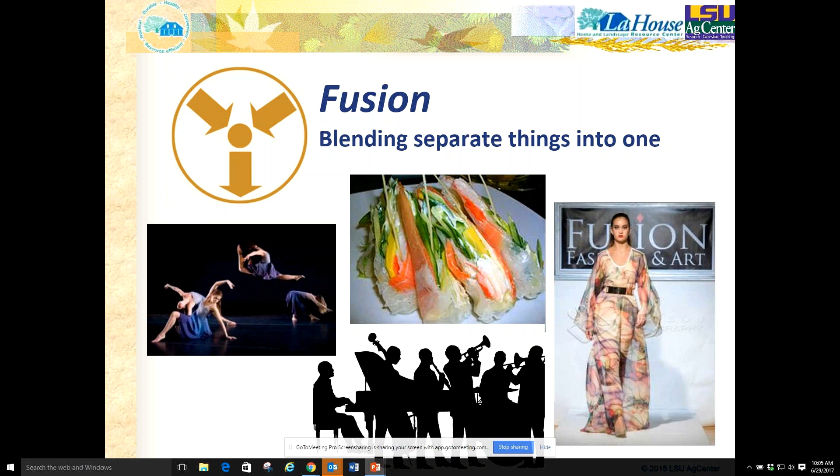This tour will show you how we have blended the benefits that people seek and want at our La House Resource Center. La House is short for Louisiana House, and we use that to address both the restoration after natural disasters and other benefits that we seek. Fusion, we see it everywhere in our culture today. What that means is the blending of things that used to be separate into something altogether new and better that's combined into something else. We do it with fashion, with food, with music, with art.

But when it comes to housing and the programs that relate to housing, and the research that goes into it, and whatever is facilitated, often at our government and agency level, it's kind of been in silos. We have these agencies with separate missions, and so the housing programs and these benefits and features have kind of been in silos historically. But being that our program is the Cooperative Extension Service, an educational outreach arm that is all about taking science-based information and combining it in ways to address needs and issues and to be a change force for people in the real world, we knew that we wanted to pull all of this together.

So way back in 2000, we developed this vision to create a center which we call La House, short for Louisiana House, to shape the future for Louisiana living, but really it's become a whole regional facility as well. It's all about the concept of sustainable housing, and it's a permanent educational exhibit now that's open to the public, and it applies well to the entire region, the southeast region.

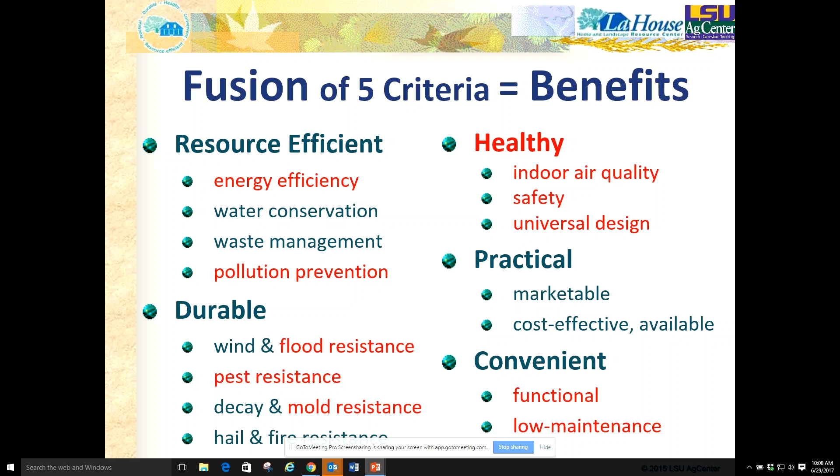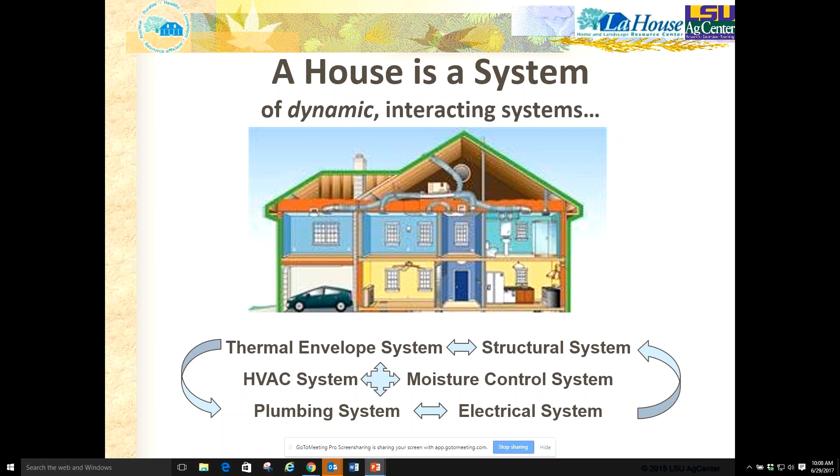Having one without the other just doesn't cut it. They need to be integrated. But to do so with the modern knowledge that we have, especially when you get to high efficiency, it's really important to recognize the house is a system. It's not just a box. It's a system of dynamic interacting systems, just like the human body, and anything you do to one affects other portions.

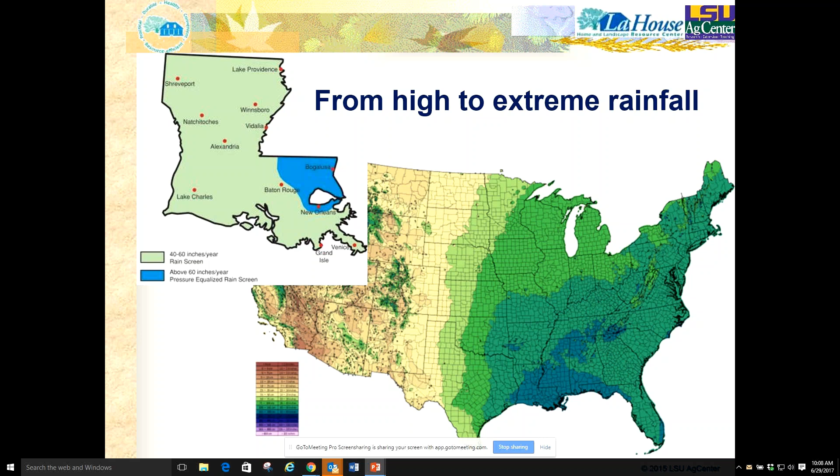Also, it's important to consider climate. It matters, it makes a difference. It has big implications with moisture control. Our part of the world is the hot, humid climate zones 2 and 3, pretty warm and humid. But we're also a very wet area down here, and that poses a lot of challenges. Much of the country is wet also, though we may be a little wetter.

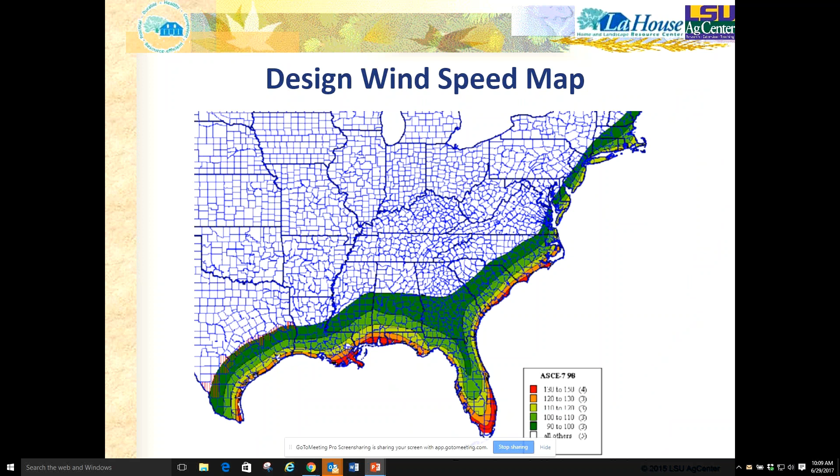So La House was built to be kind of a showcase of solutions to all of those conditions and issues and climatic factors, but not just one solution, because there isn't just one good way to tackle that.

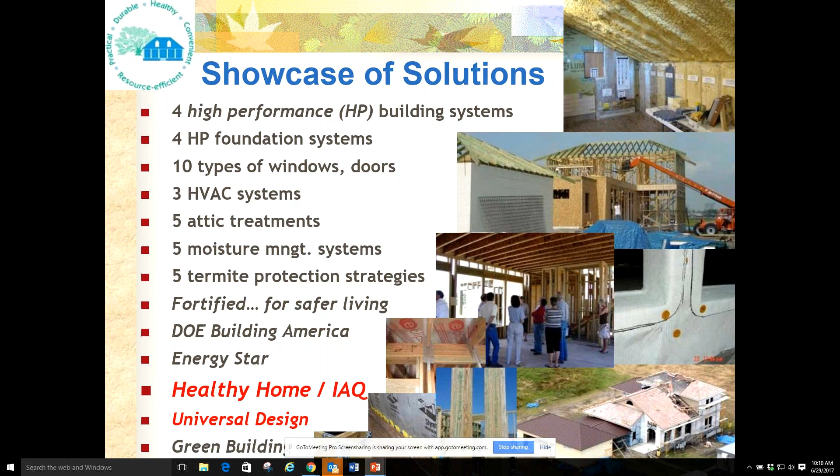So the house essentially shows 4 different high-performance building systems and a lot of different components, 3 HVAC systems, 4 raised foundation systems. It demonstrates all the features. Each of those demonstrate the features of fortified for safer living, as well as healthy home and indoor air quality criteria and universal design, which we'll touch on more.

As I mentioned, La House has 4 high-performance building systems, each wing, and then the garage is a 4th one. It's a different one, and you'll get to see just a little bit of that.

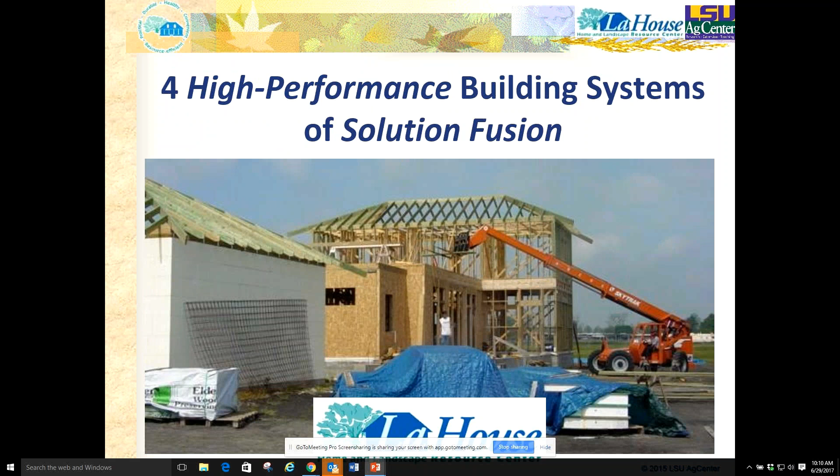It was designed by local architects to really blend all these criteria with the design of the LSU campus, because it's on campus. But the first level of the house really is furnished like a home, to have a look and feel of a home, to really help the adoption process, the emotional side, and then a meeting space in what looks like a garage on the outside, conditioned.

The second level is our staff offices and a big exhibit room in actually the unvented attic.

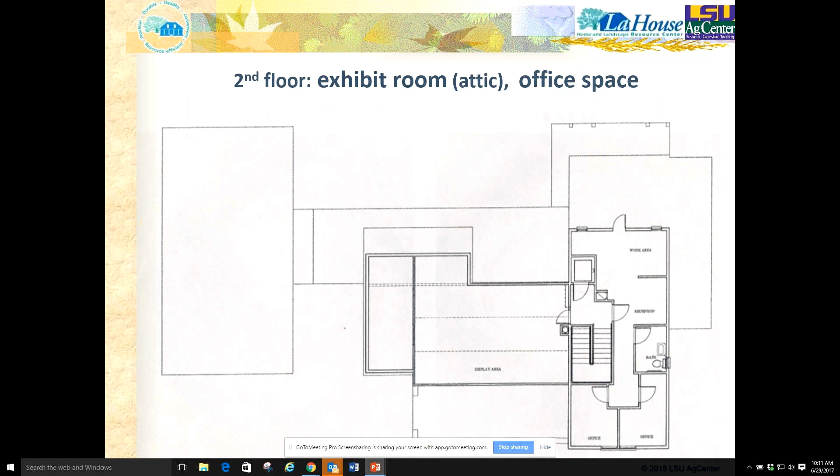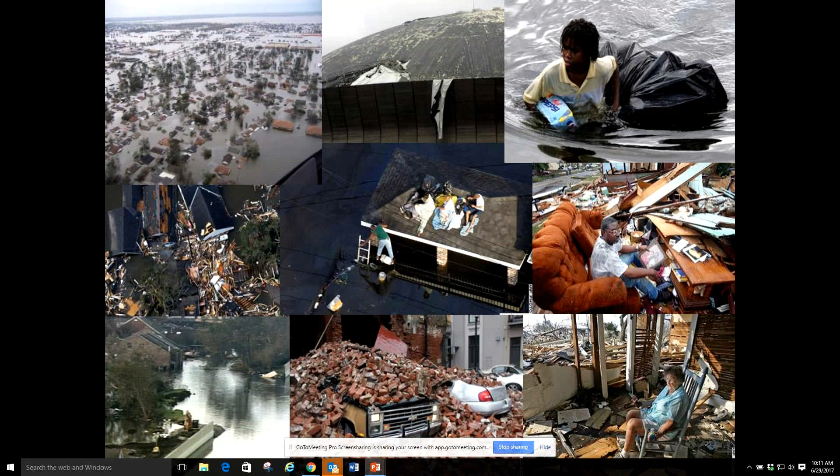So we were getting underway with that, and then in the year 2005, everybody knows the horror that happened, Katrina and Rita, within 3 weeks of each other. You saw the images on television. You saw how terrible and awful it was, and what my state had to deal with. But the impact upon just one state, upon my one state, was unprecedented in the history of this country.

But beyond that, think about the impact on families, what they went through. Look at these images and just try to imagine the work, the time, the cost, and the toll on their health and well-being to deal with this.

That gave all new meaning and new focus to our kind of slogan and our effort in our program, to the concept of, as we shape our homes, we truly are shaping our future. It matters. It's not just about aesthetics.

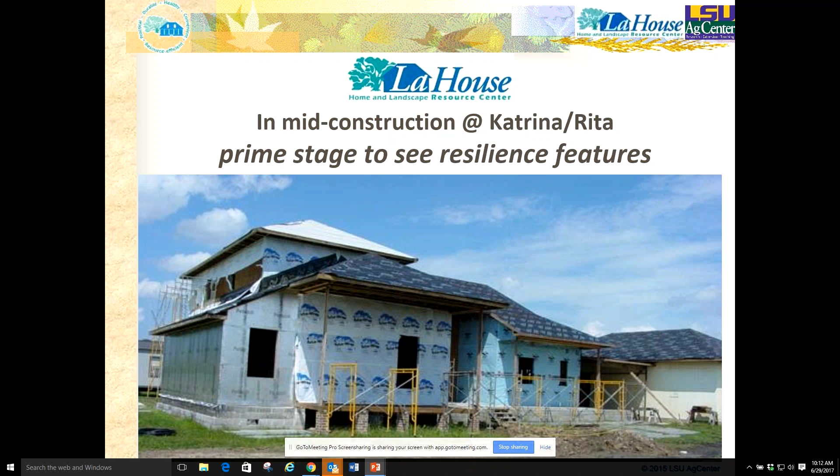La House happened by chance to be in mid-construction when Katrina and Rita hit, and it had all of these fortified features, all the hurricane, the flood hardy, the elevated foundations, the termite features, already fully exposed. So it was kind of this ready exhibit at that point, which was just almost eerie that it happened that way. We left it that way, showcased it, did open houses for 2 years, and it was really perfect for that.

But then we went back and finished it in '08, and now it is a facility that's open to the public Monday through Friday. People can just drop in for self-guided tours. We have cutaways and all kinds of things, and there's a little tour map.

So I'm going to cover those kinds of features that are primarily the primary purpose and objectives, and the benefits of them are the healthy home features that are exhibited in the house.

I'll do this through touching upon each of the 8 principles of healthy housing and show some house-related exhibits and components that address each of those principles throughout these criteria.

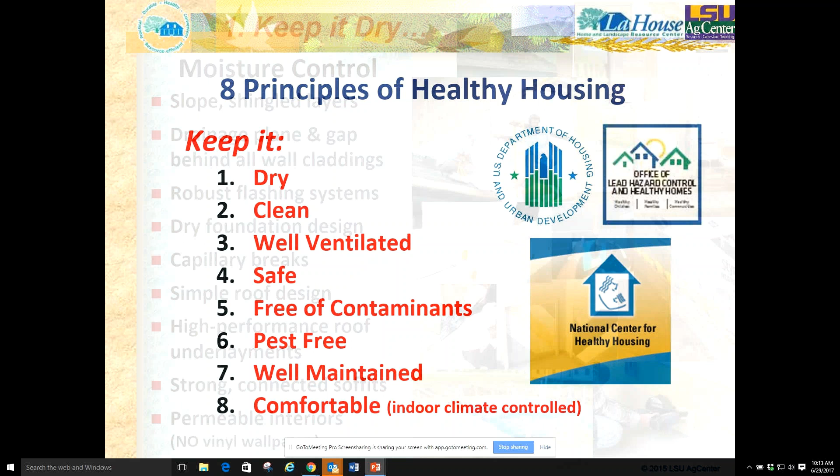First and foremost, keep it dry in our wet, flood, hurricane-prone, hot, humid climate. A house incorporates a whole range of moisture control and rain control measures to minimize water intrusion from rain, allow it to drain down and out, and keep it from wicking through foundations and other components. These are all key features, because water intrusion is going to happen, and we try to stop it by realizing that water normally flows downward by gravity, except when it doesn't. That happens a lot because of wind, hurricanes, wicking through materials, soil, hydrostatic pressure, adhesion, all kinds of things. So keeping all that in mind.

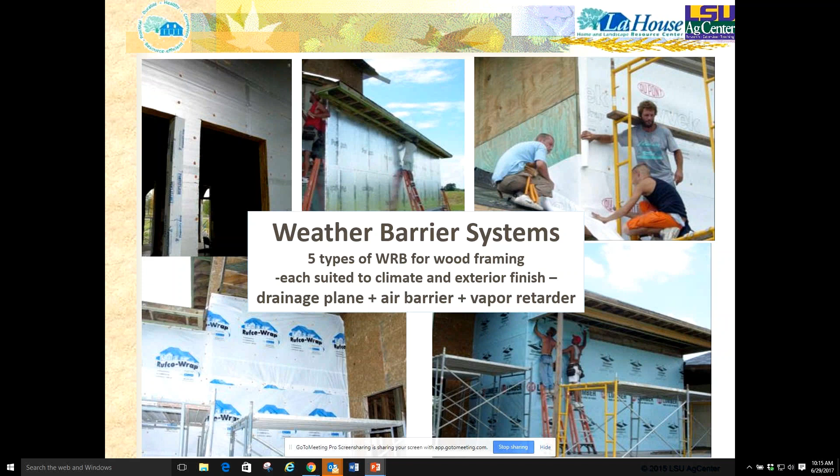That's why building with good weather barrier systems is really important. We used quite a variety of them, meaning a water-shedding material outside of the wood with a gap so it can actually drain. We also sealed it to create an air barrier, which in our climate is good to reduce moisture vapor transmission on the outside rather than the inside layer. A complete drainage plane done right in the field, when you ride around and see houses under construction, is really hard to find. It's rarely done right, and it's even harder to add later.

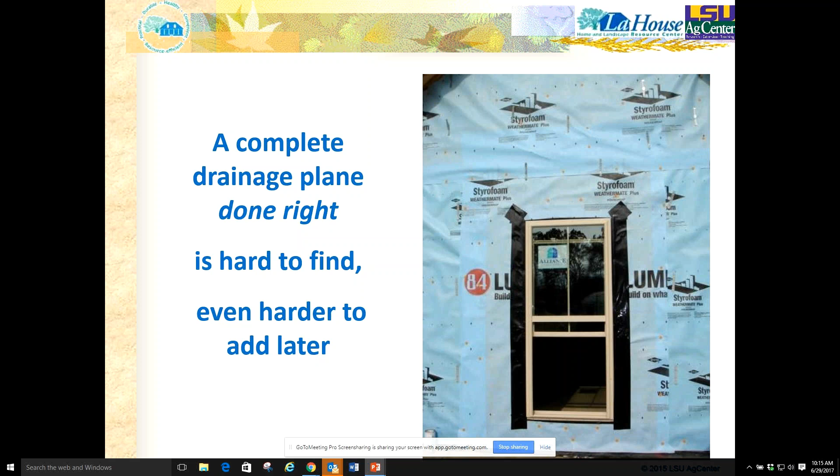The weak link is really the detailing around windows and doors, the way all of that is integrated. The house shows a variety of methods we used. There are wonderful products out there to do that now, and we have exhibits you can see, a cutaway with a fact sheet on how to install these new products to provide detailed protection at the spots where windows tend to leak the most.

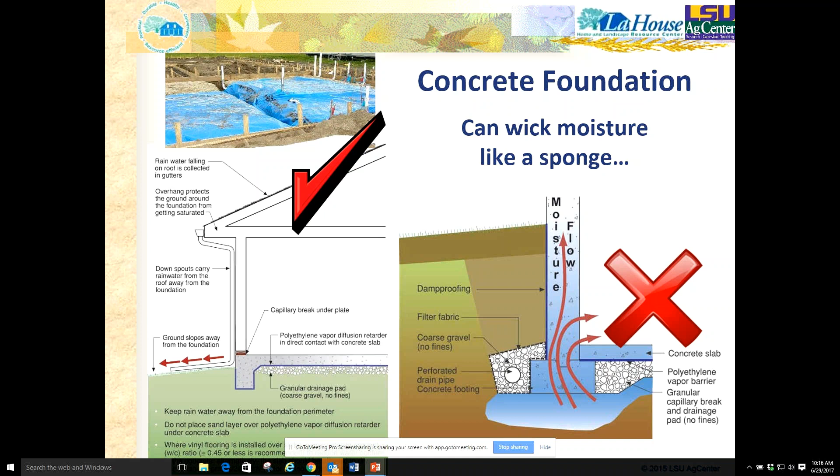The foundation is another huge factor in keeping it dry, because most people don't stop and think about how concrete, brick, all of this really wicks like a sponge. We tend to have flaws where we put a vapor barrier under the flat part, but not the grade beam. So we teach that as well.

What we found is that really just two subfloor insulation systems worked really well to maintain a stable subfloor moisture condition in raised homes, which we need for flood-prone areas. Around the rest of the country, all the research and the tendency is to go with the sealed, conditioned crawl space. But that's not a good idea in a flood zone, or in my opinion, any place in South Louisiana, given such a high water table and our termites.

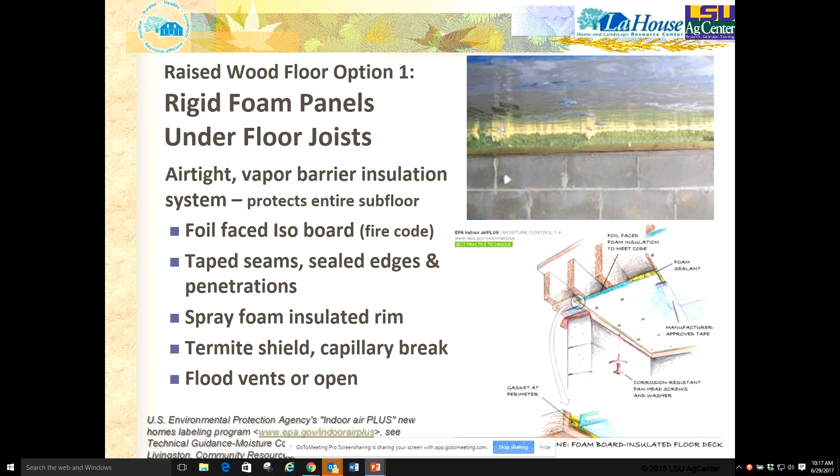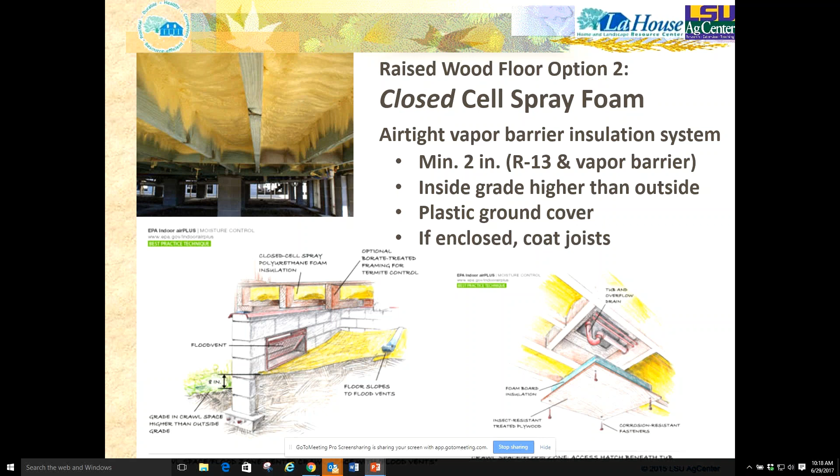One system is foil-faced isocyanurate rigid board under the entire subfloor system, under the joist, taped and sealed airtight. The other is closed-cell spray foam sprayed right under the subfloor. Both of these create an airtight, low permeability, integrated insulation system that keeps the subfloor dry, and then you can have any kind of flooring you want.

Indoor humidity control is extra important for health, and it's even more challenging and important in energy efficient homes. The more energy efficient the home or building, the smaller the margin of error for moisture control. You also have very little need for cooling and heating, but the need for dehumidification does not get reduced—it does not change. And so that becomes difficult.

So moisture control: reduce moisture generation, exhaust it where it is created, right size the HVAC system so it's not too big, so it runs more, have a variable capacity or added dehumidification.

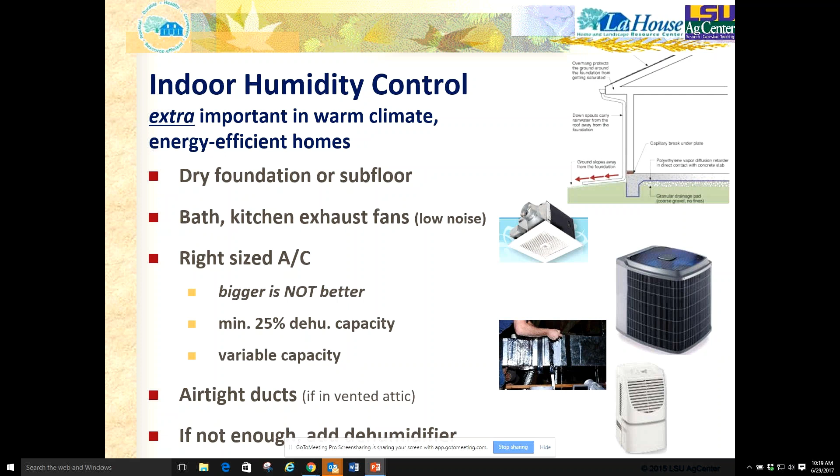And prevent leaks in ductwork, which tends to drive it. We'll talk about that a little bit. These are all really important strategies.

The second healthy home principle is keep it clean.

La House illustrates that with easy care, cleanable, smooth surfaces that are easy to clean and keep free of dust mites and other contaminants.

We also include the Japanese concept of shoe cubbies at the family entry, so you can put all your dirty stuff there and not track lead-laden soil all across the house, and a lot of mold and moisture resistant materials as well.

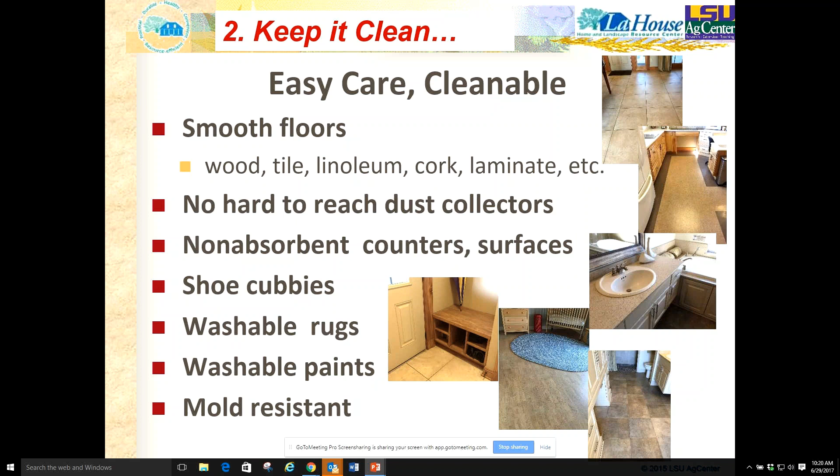The third principle is keep it well ventilated. This is key, and there are three components to proper ventilation.

In the colder parts of the country, you're thinking you need ventilation so you don't have combustion gas buildup, but that's not so much our issue.

Proper ventilation really is about having good local exhaust that works at the source of a pollutant, and having some clean, fresh air that comes into the home to dilute indoor contaminants, things that off-gas.

And to properly distribute and control the airflow so that you minimize humidity problems, a big issue for us, and energy loss at the same time.

So for us, and really most of the country, the best practice is to build tight and vent right, but you can do that a little differently whether it's a cold climate or a hot climate.

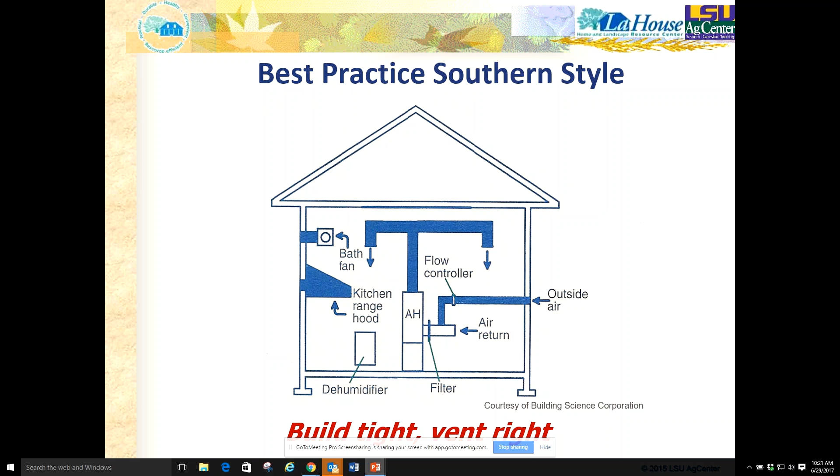And this kind of illustrates best practice Southern style, which I'll touch on.

First and foremost is having effective exhaust, spot exhaust, where you generate a lot of moisture and where you generate pollutants, over the kitchen cooktop and in bathrooms and laundry as well.

And if the fans are not quiet, people won't use them. So quiet fans. But the real limiting factor for many is often lousy installation of the ductwork.

With S-curves and U-turns and flex duct, that will reduce the airflow greatly. So proper installation of quiet, powerful exhaust fans is important.

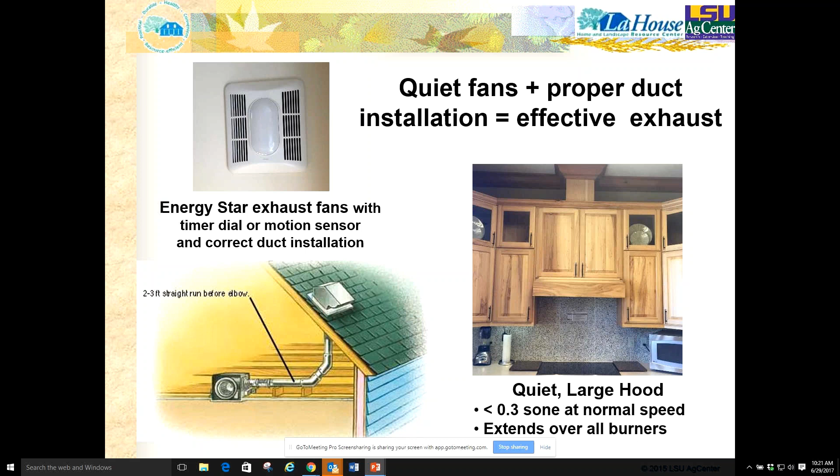And in our climate, supplying fresh air, not exhausting air, is the way to get that fresh air ventilation. And that gives you control.

You can control the amount with a damper control, flow control system, filter it, know the source, where it's come from. That is the best way to bring in just the right amount of fresh air without moisture loading.

But when doing so, particularly in the shoulder seasons when you don't need either heating or air, sometimes at a highly energy efficient home that's not enough, and supplemental dehumidification may be needed.

La House has four different types and levels of dehumidifiers, from a low cost $120 model to a $2,000 ventilating dehumidifier, which is what's actually used here, to show the range of solutions that fit the need.

Healthy home principle number 4 is to keep it safe, and that's where we bring in and illustrate universal design. Universal design is not just about ADA for people who use wheelchairs.

It's about design for life, for all ages and stages of life, from babies and toddlers, having it safe for them, and that includes lead safety, to people who use wheelchairs or walkers or have arthritis or vision issues.

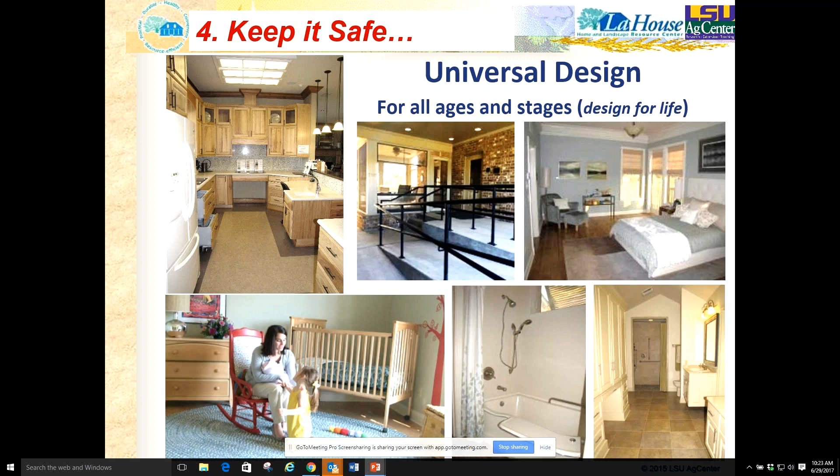Accessibility, whether you're standing or sitting, see well or not, whether you're a little child or an elderly person, you can function and be comfortable and safe in this situation, in this home.

Principle number 5 is keep it free of contaminants. That means good indoor air quality, good indoor environmental quality.

La House has no combustion inside the building envelope other than direct vent sealed combustion. We have a fireplace because people want that, but it's a direct vent sealed combustion, a closed loop. It does not use indoor air to fuel the fire, and there's no chance of backdrafting.

Everything else is outside the building envelope, any gas equipment, the gas tankless water heater, a gas backup furnace, and nothing else is inside. So no combustion indoors within the building envelope.

Effective quiet exhaust, mold-resistant materials. Another feature, particularly for any place where there's air conditioning for more than a couple of weeks out of the year: there should be no vinyl wallpaper on interior walls because that's a risk of growing mold behind it.

We do use mold and moisture-resistant materials, low VOC paints and other products, smooth washable furnishings and floorings, shoe cubbies, and dust controls. We have reclaimed furniture, but it's all lead-free. And then, of course, flood and radon-resistant raised foundations to deal with keeping it free of contaminants.

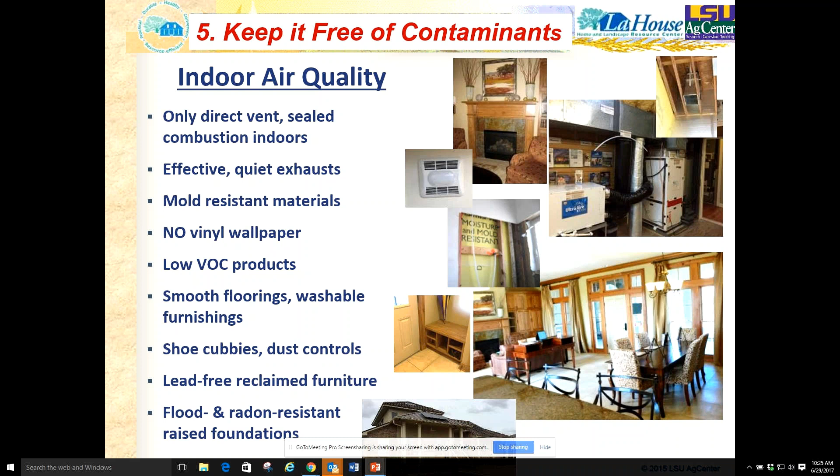The 6th principle is keep it pest-free, and La House illustrates a variety of integrated pest management methods, both for wood-destroying insects as well as normal bug infestations. Tight construction, which is good for energy efficiency and moisture control, is also helpful to keep the bugs out. So these gaskets around penetrations and tight air sealing, as well as favoring borate treated products and boric acid-based pesticides because they're very low toxicity and benign to people, pets, and the environment. So that's barriers, along with moisture control.

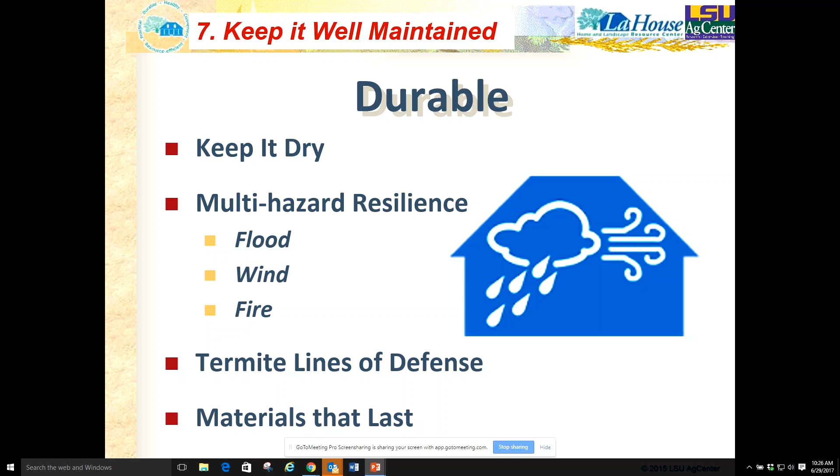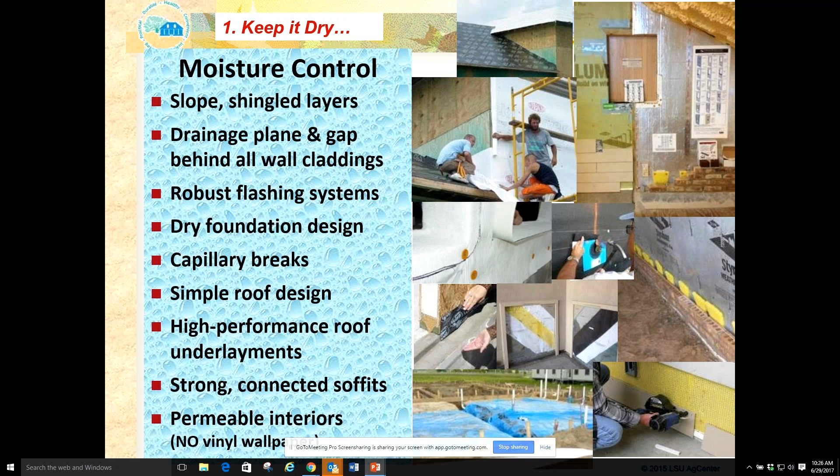The 7th principle is keep it well maintained, and that's where our major criteria and benefit of durability comes in, both in terms of durable construction and materials, but also in terms of hazard resistance - flood, wind in particular, and also fire. Again, moisture control is key for durability, otherwise you end up with decay and degradation. We've already touched on this, so I won't go through it again, but just to mention it.

And then the next big item is flood resistance. We are a very flood prone area and state, as you know, and that is our most common disaster that affects the most people here as well as throughout the nation.

La House illustrates three elevated foundation system concepts, and also the concepts of dry flood proofing and wet flood proofing. Dry flood proofing is trying to keep the water out by sealing it and having closures. Wet flood proofing is the concept that water would come in but do very little damage, so you just clean and don't have to gut and replace everything.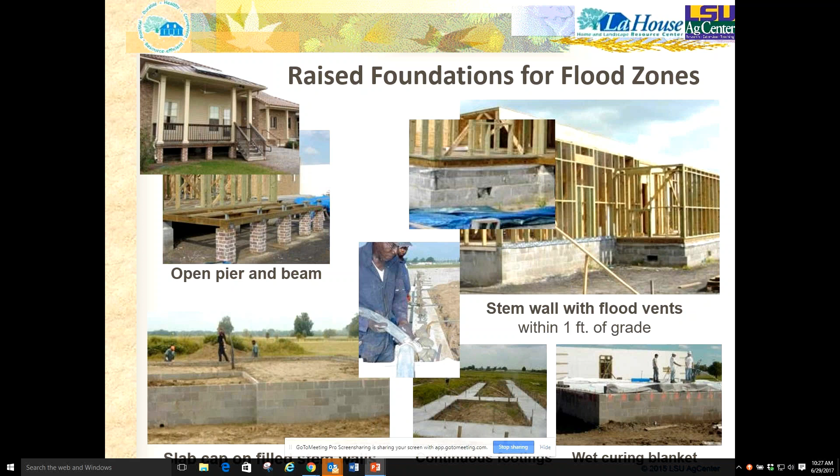The raised foundation systems for flood zones - we show the slab cap over a filled stem wall, very robust but kind of expensive, as well as the open pier and beam, the more traditional approach, and the stem wall with flood vents within a foot of grade as required by the flood insurance program.

We also show the concept of wet flood proofing, but I rarely use that term. I generally call it flood hardy. And this is particularly valuable in areas where there's an uncertain flood risk.

The flood maps are based on a 1% chance in any given year, and you can certainly get floods beyond that. The area where I am, we just had the worst flooding in our history last year, the historic Great Flood of 2016 in Louisiana, and about 70% of all the homes that flooded were outside of the flood map risk zone because this was a historic flood that exceeded that. Particularly in areas where your flood zone depends on levees and pumps, like New Orleans, that's not a good bet to rely on being above it.

So the flood hardy building systems are concepts that create a building assembly that is below the potential flood risk, not just the flood map risk, that can be drained, flushed out, ventilated, dried, cleaned, and restored and put back into place without having to gut and replace and wait for contractors and wait for materials and get rooked by shady ones who just inflate their prices or steal the money and leave.

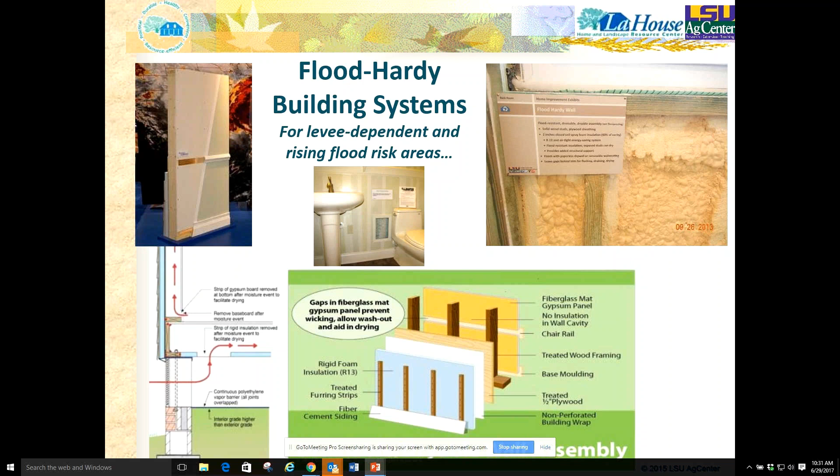Our teaching center, which we call our garage, is an insulating concrete form building system that is flood hardy in itself, but it also had waterproofing put in the bottom 3 feet. If we had flood enclosures, which we don't really for the doors, that could be an example of dry flood proofing, which is approved for commercial structures by the flood insurance program, but not for residential.

But some people may choose to want to do that. Besides flood, hurricane resistance is important for durability in the hurricane zones or any high wind zones.

Studies have shown that this sequence are the major building envelope issues. The major damage and losses on property insurance were in this order: top of the list are roof loss, roof damages that allow water to come through, and broken windows that allow the wind in and cause structural damage. So loss creating big holes in the building envelope is what puts the structure at risk.

So flying debris, window and door anchorage, garage doors, sliding glass doors, and then water leakage through these openings, and finally the ridge vents, gable vents, and soffits that blow out. Those are the major issues.

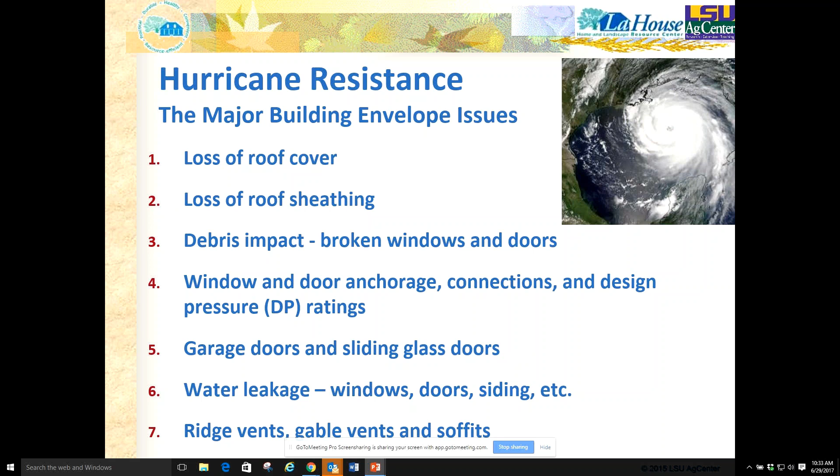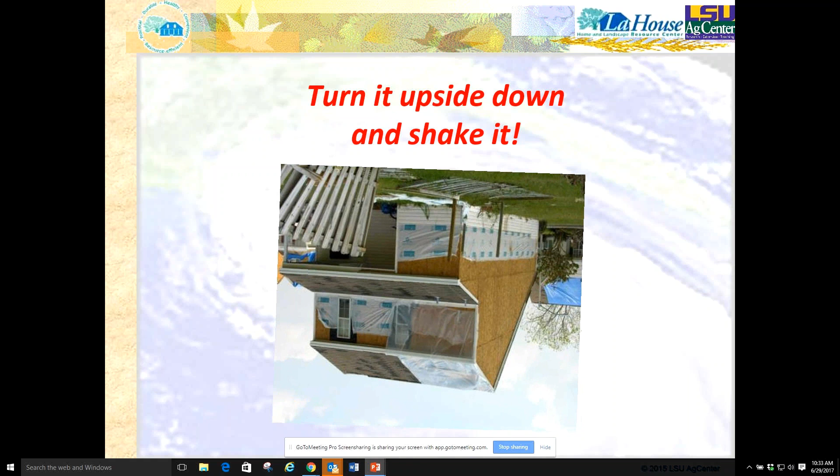When there is a high wind event like a hurricane or a tornado, we build houses to hold up their weight, but what it's really like is turning the house upside down and shaking it. Where is it going to come apart? That is the weak link.

Wind resistance was incorporated throughout these 4 building systems to go to a higher level for the fortified program, up to about 130 miles per hour, which is beyond what's a code requirement here. In doing that: good aerodynamic roof designs, hip roofs with moderate slopes, high performance wind-tested roofing and underlayments, full structural sheathing to prevent leaning and racking, nails with good pull-out resistance, and window protections from flying debris, stronger garage doors and connections.

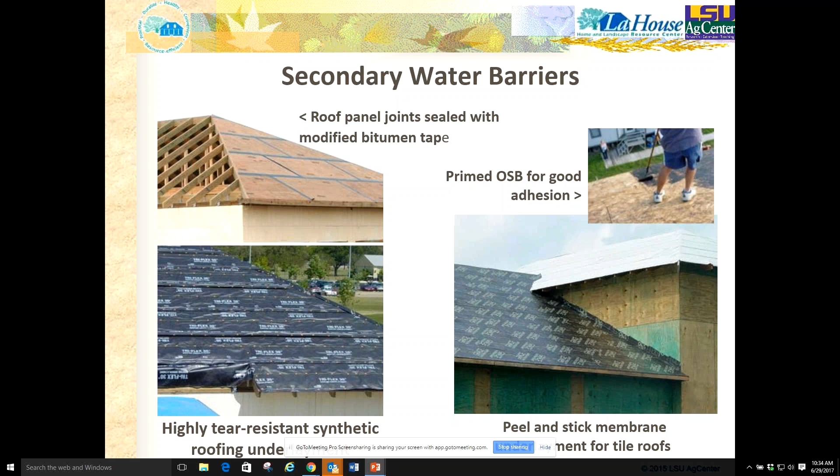First of all, with that roof is secondary water barriers. Yes, the wind-tested roofing, but if you do lose some shingles, keep the water out. So high-performance underlayments and taping the seams.

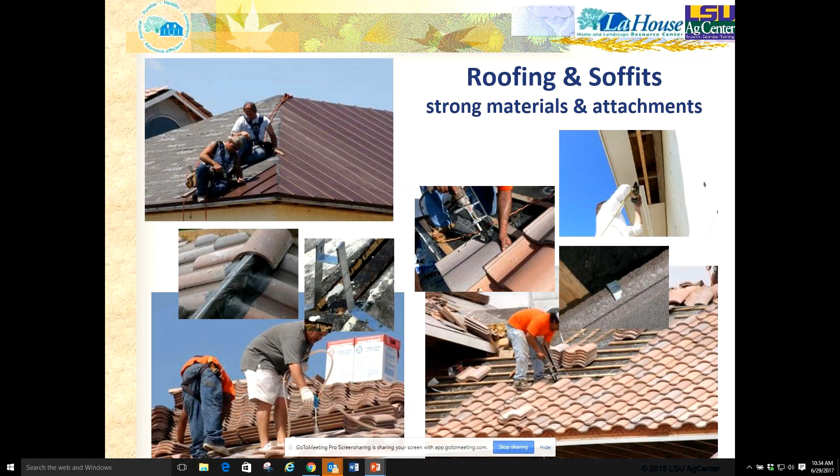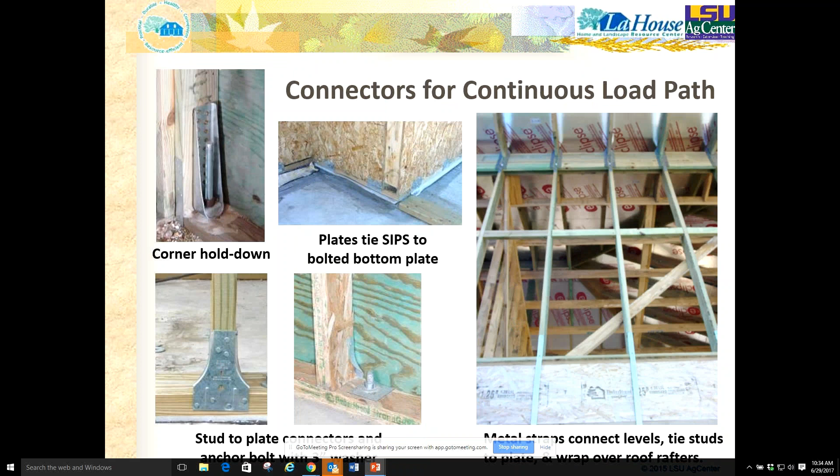Houses utilize extra strong connections, mechanical connections, and hurricane clips. Strong soffits actually fastened, not just hung, so that they stay in place. And of course the metal hardware, the connectors tying every component of the framing together from the roof all the way down to the foundation.

We show about 7 or 8 different kinds of protections from windborne debris, many of them retrofittable as hurricane shutters or screens or fabrics or removable panels that are much easier, lighter weight, and a more convenient alternative and easier to store than boarding up with plywood or OSB.

The garage door is often the most vulnerable opening in a typical home, especially an attached garage, and that's where major structural damage is rooted. So this shows a reinforced garage door.

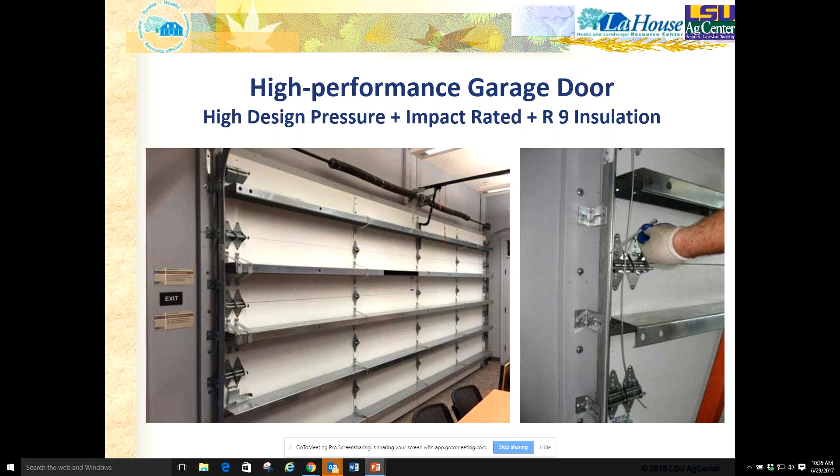We also have some extras, like taking the master bedroom closet and creating a hurricane shelter that is built with normal materials, normal hardware, normal skills, but to a higher level of wind and impact resistance than you could afford to do with the rest of the house.

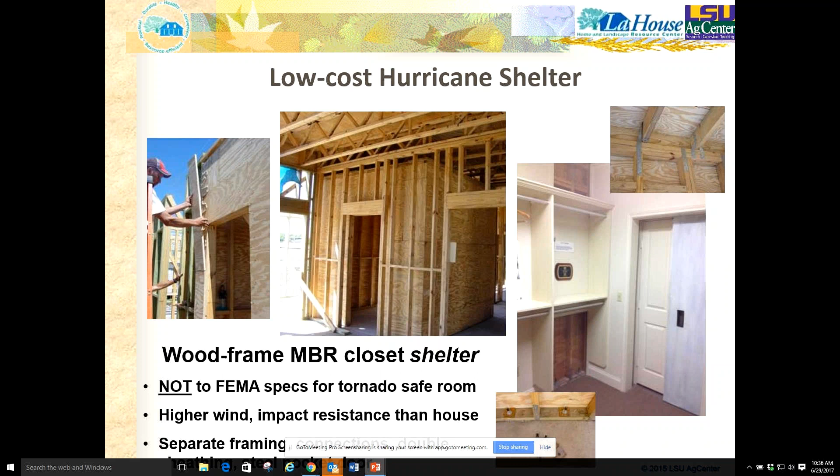Now, this is not a FEMA qualified tornado safe room that could withstand an EF5 tornado, but it would certainly be a safer place to ride out a hurricane, and would be safer than anything else in a low level or fringe area of a tornado. But at an affordable level, because actual safe rooms are very, very expensive.

And then getting back to restoring resilient and healthy homes. So La House does include a variety of examples and exhibits of what people can do with their current homes, particularly after it's been damaged by a storm. As I mentioned before, we have a couple of exhibits of the flood-hardy wall, the drainable, dryable wall with closed cell foam, but we also had the opportunity to create a mobile exhibit that we call La House Mobile.

It was actually built by students. Senior engineering students had to do a senior design project, and we worked with them on this, so this kind of goes on the road, and it shows a lot of retrofit solutions.

As well as the flood hardy wall, it also shows how you can remove siding and add some hurricane straps. Not ideal, but better than nothing. It also has the wind-tested and rated roofing shingles with a high-performance underlayment and taped seams of the roof decking with the ring-shank nails.

Some other things that we illustrate are the removable storm panels, floorings that are resilient. Instead of going back with carpet and wood floorings, and laminate and other things that would have to be tossed after a second flood, go back with flood hardy floorings. And we show glue down tile on slab or composite, limestone vinyl composite.

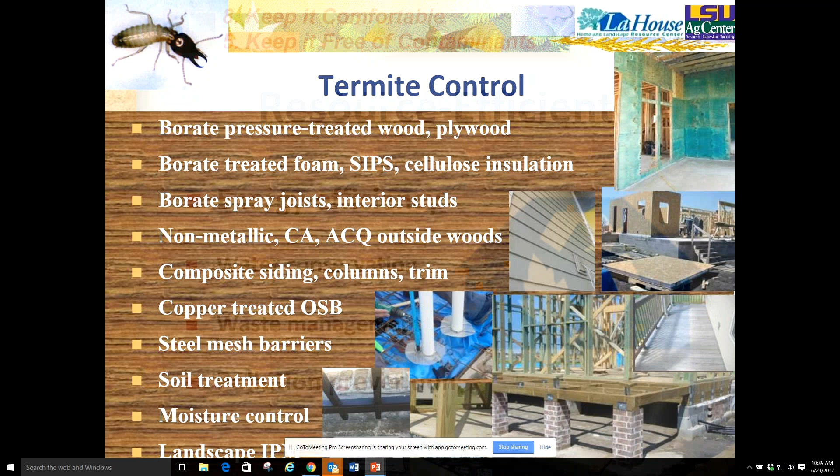The eighth principle of healthy homes is keep it comfortable. Actually, it's keep it thermally controlled, but nobody knows what that means, so I like to use the term keep it comfortable, because basically keeping it warm enough in winter and cool enough in summer to be safe and healthy for anyone. But in doing so, a good way to do that is with energy efficiency, so that you can afford to keep it comfortable.

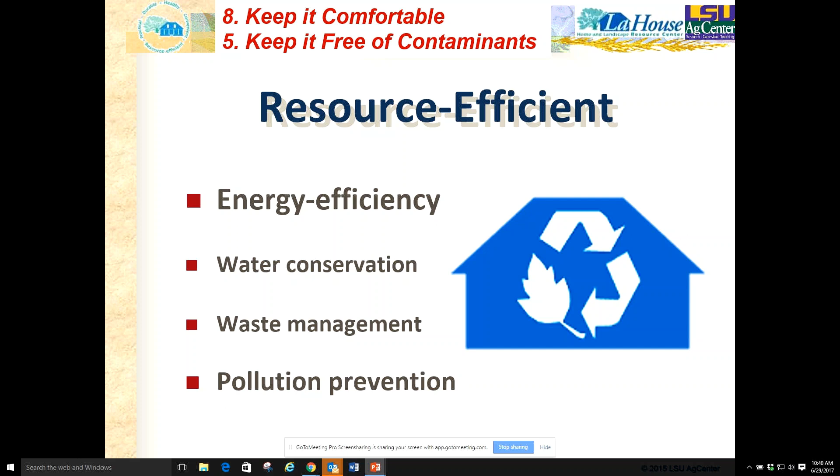That also needs to be done in conjunction with number 5, keep it free of contaminants. You don't want to create an indoor air quality problem by inappropriate weatherization improvements that create issues. So back to keep it comfortable with energy efficiency that actually performs, and it actually pays, so that people get a financial benefit as well as the health and safety and comfort benefit. It's not just about insulation, and particularly in this climate, that's just one piece of what's needed. It's about addressing all of these factors to create a total package of comfortable, healthy energy efficiency.

Energy efficient design and construction in the Deep South and the Southeast really is all about these 3 things. Airtight, so you're not leaking your conditioned air in and out and bringing that hot, humid air in. It's about the continuity of the insulation, not so much a huge amount of thickness or R value, but having it without gaps and voids, because that's what typically happens. And then for us, sun control is the big deal, because the biggest part of our conditioning, of our energy bill, is air conditioning.

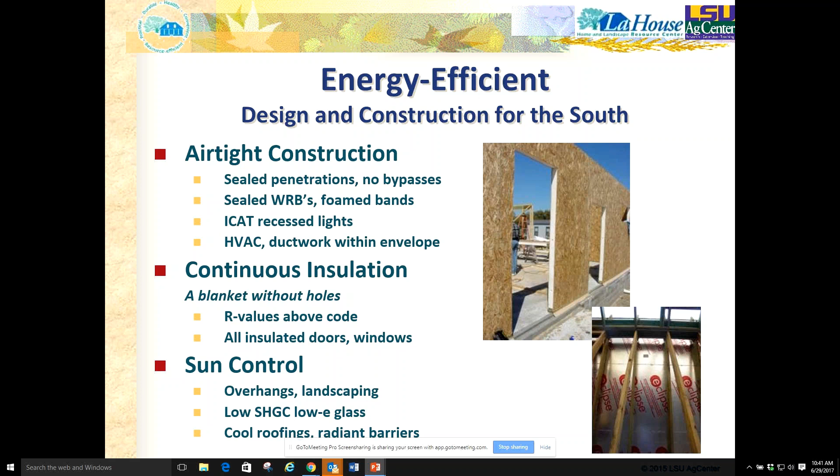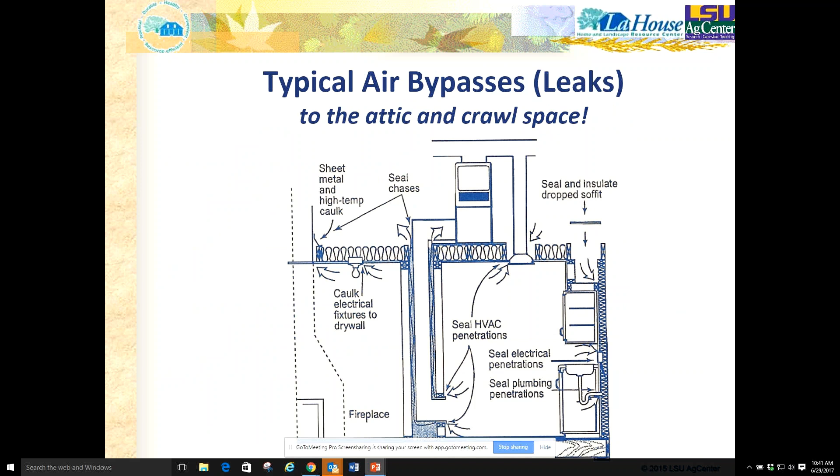And almost everyone has air conditioning, because if you don't, it's really oppressive down here. So reducing heat gain is important. The typical home has tons of leakage points, and the biggest leaks tend to be in that ceiling, what I call Swiss cheese ceilings we tend to have. And it exchanges air with the attic, that hot, dirty attic, so that is not healthy. So addressing those is key.

La House, as I indicated before, has 4 different high-performance building systems that are energy efficient, and each of them reinforced for durability and hazard resistance and health as well. The living room is 2x4 framing, kind of standard practice, but enhanced for added performance, for higher performance and more resource efficient use of products for moisture control, for energy efficiency, and for hazard resistance.

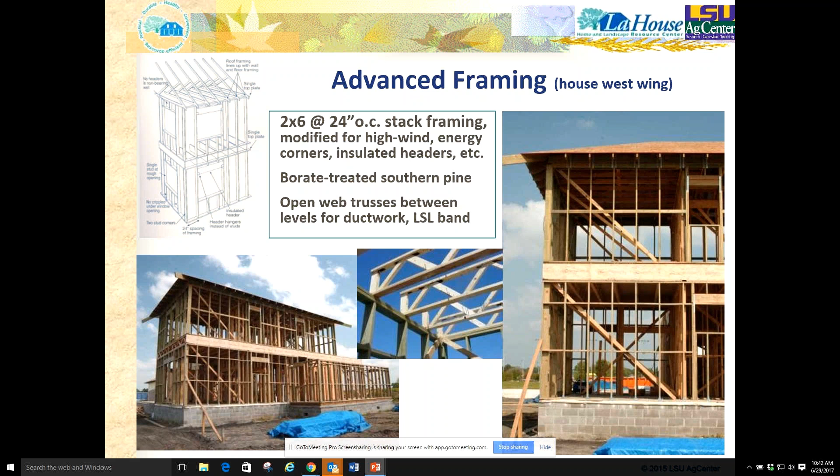The 2-story west wing is advanced framing that's optimum value engineered. We use bigger studs, 2x6s spaced further apart, 24 inches, so you can get more insulation in that wall cavity, and it's kind of a stack framing. You can put ductwork through those open web joists between the floors, keep it within the building envelope. So lots of advantages to doing that for about the same cost, or less actually. The framing details are a little bit different, but not hard to do to allow insulation where it's often missing in standard construction, the corners, the window headers.

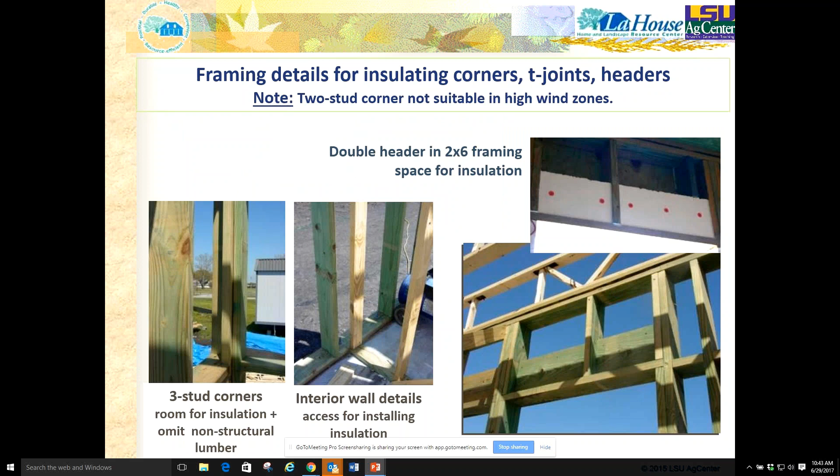The third building system of our east wing is structural insulated panels. These are factory-made panels, which is insulation sandwiched between oriented strand board panels on both sides. So it's structure and insulation in one, goes up really fast, and provides total continuity of insulation and inherently a very airtight building envelope without a lot of need for special workmanship and attention to detail to achieve that.

Those same benefits can come from insulating concrete form. Our garage or training center is built with that, a very low waste system. Also very strong, very resilient from a hazard standpoint, but kind of expensive. And so it's sort of at the high end of our continuum of performance benefits and price as well.

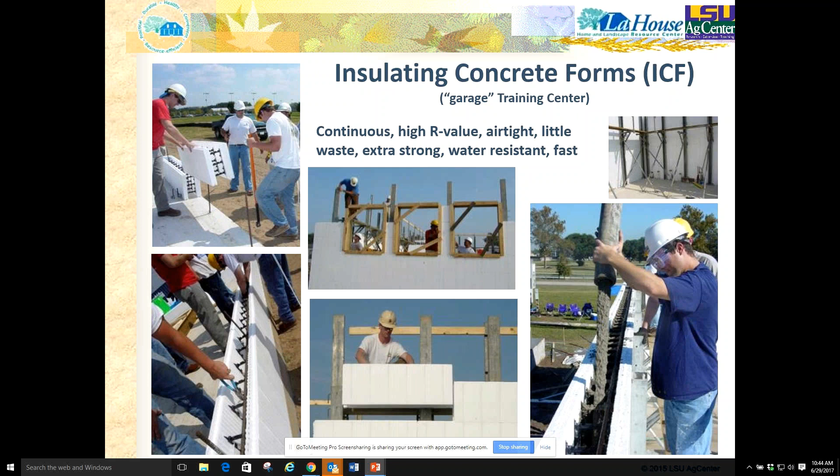Throughout the frame systems, we strategically selected effective insulation systems that provide that full continuity of coverage and help facilitate the air tightness, the tight construction that we seek. And we favored the borate treated cellulose as insulation where we didn't need the spray foam, so we tended to use those two in strategic areas because of all the benefits associated with them.

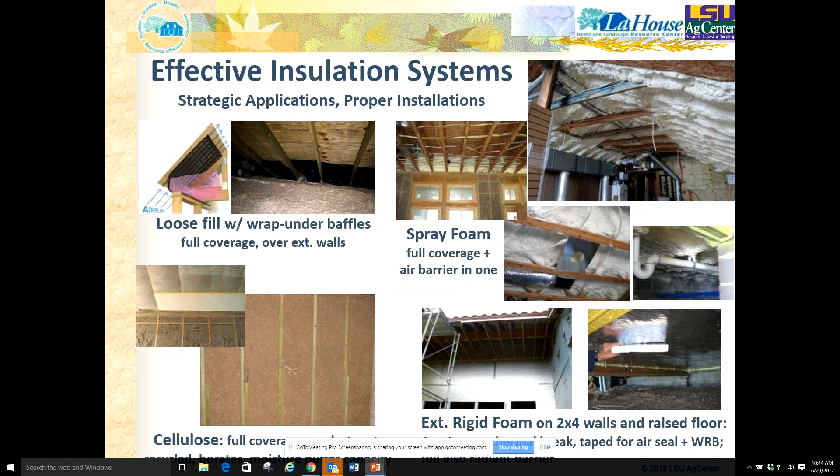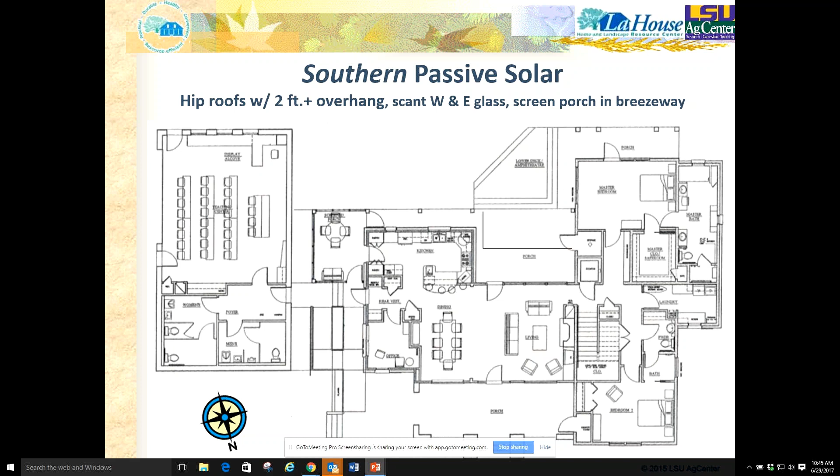We talked about stopping that solar heat gain, and this is especially important for people who cannot afford any air conditioning, but even those who do, trying to reduce that heat gain is important. So LaHouse incorporates what I call southern passive solar. Instead of passive solar concepts to gain heat in winter, we do it more to reduce heat gain year-round, particularly in summer. So that orientation has most of your exposure and glass on the south and the north, very little on the east and west.

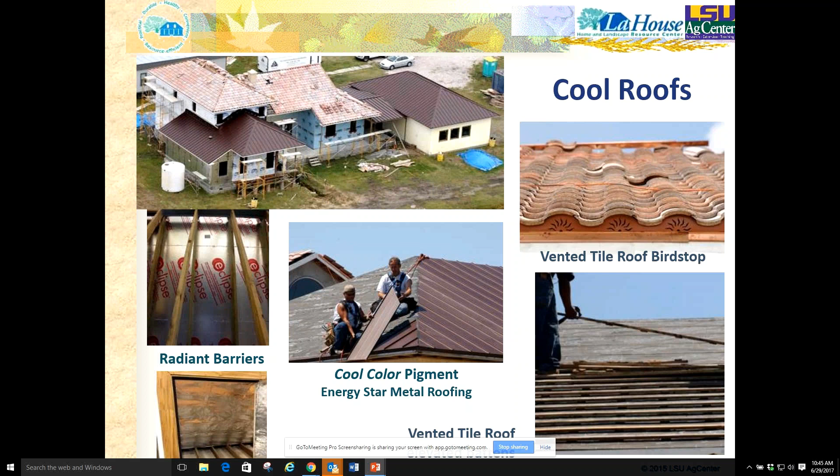We employ a variety of cool roof strategies. The metal roofing, though it looks like a dark brown, is actually a special pigment that is an Energy Star rated roofing because it has the solar reflectance of a light color even though it's a dark color. And then elevated tiles on battens provide a ventilated roof, and in our vented roofs we have radiant barriers to reduce the radiant heat gain into the attic.

Radiant barriers were used behind the vented roof systems as well as in the sheathing systems. They're perforated there behind where we have brick veneer to kind of block some of that heat gain from the hot brick in summer.

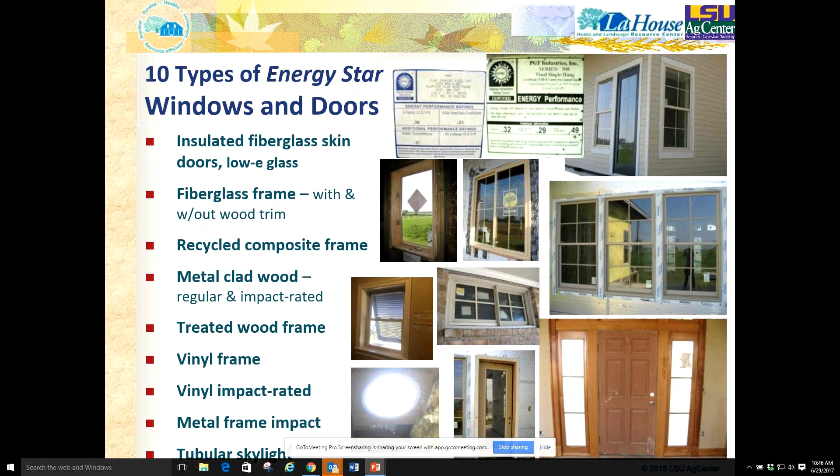Windows or glass is really important. Low solar heat gain is what really matters most to us. And so these Energy Star, low E, heat reflective windows—we have all the different framing materials, 10 different types, and the tubular skylights instead of regular skylights.

We also have exhibits that talk about sun control improvements you can make to existing homes, the do-it-yourself radiant barrier installations, solar film on windows. We have a little display that shows how effective it is by how fast those little things turn from a heat lamp.

And then the sun control strategies, the solar screening, very inexpensive, do-it-yourself option suitable for even low-income homeowners or renters to do as well to reduce the heat gain.

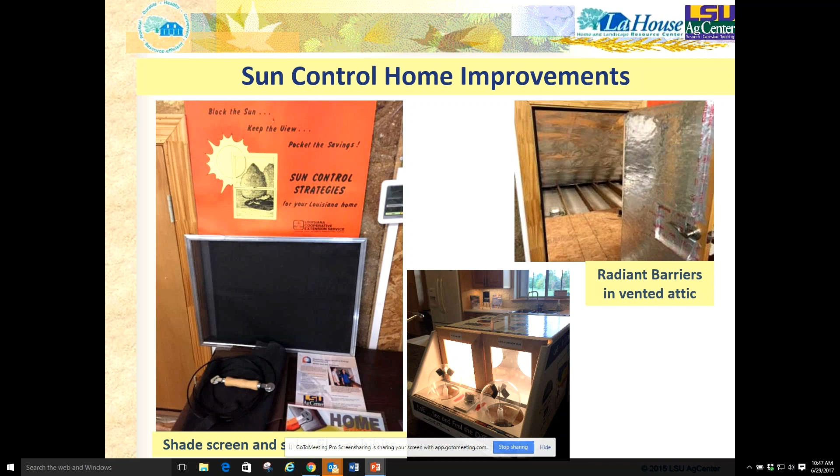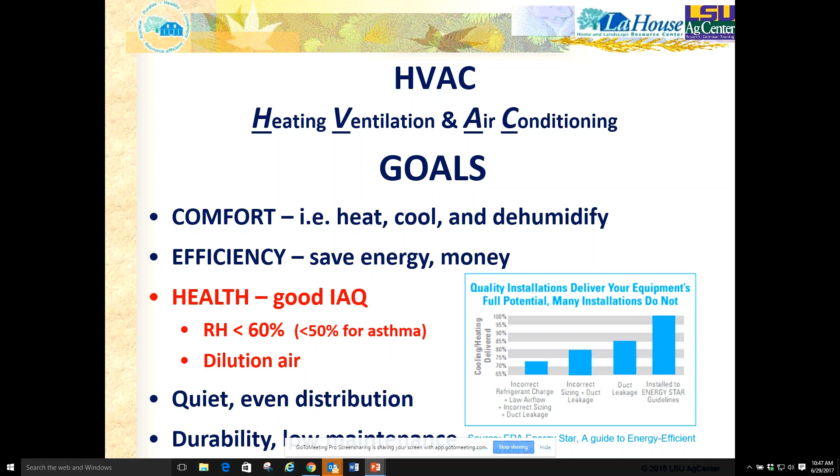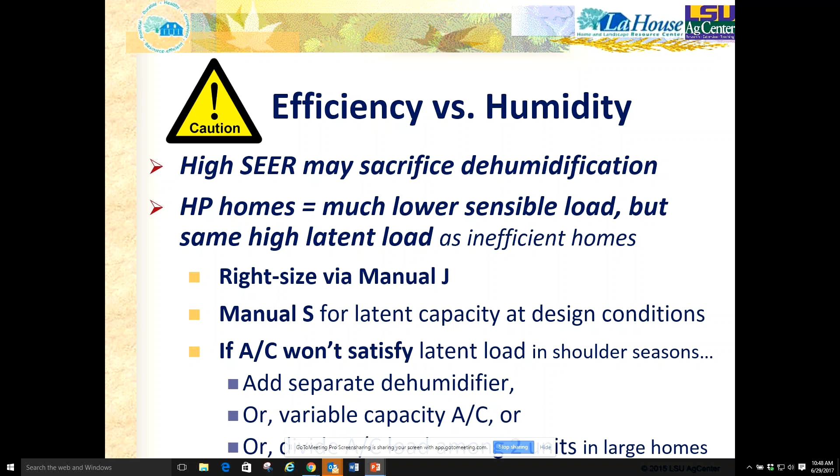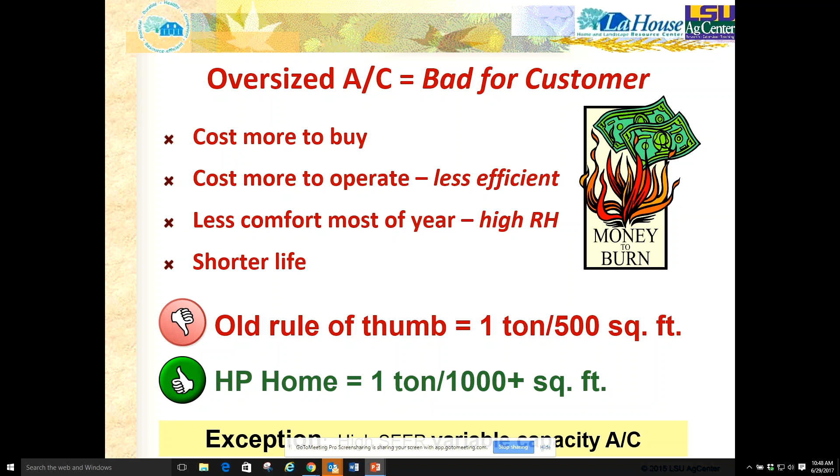So it's really important to be alert to that and make sure you get a system that has enough dehumidification capacity for the need, or supplement it with either variable capacity or a separate dehumidifier. Oversizing works against us, though people don't realize that. They think bigger is better, but that's not the case when it comes to air conditioning. Right-sized is best. And the rule of thumb is not what should be done. People should actually get a load calculation and a really good determination to right-size.

LaHouse exhibits 3 different types of HVAC systems for warm, humid climates. Of course, they're all Energy Star and right-sized, and it exhibits a variety of things. And in the house itself, we try to keep them all within the conditioned space. So the high end of the continuum is a geothermal heat pump. That's an all-electric system.

It also provides preheating to an electric water heater. That's in an unvented conditioned attic, so there's no combustion there. And this is the most expensive, but also the most energy efficient, because it's a renewable system where it exchanges heat underground in a closed loop circulation of water in a pipe in some deep wells.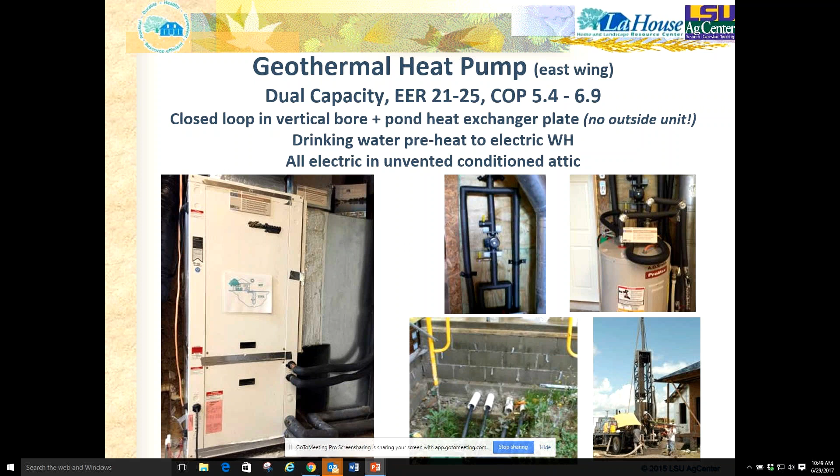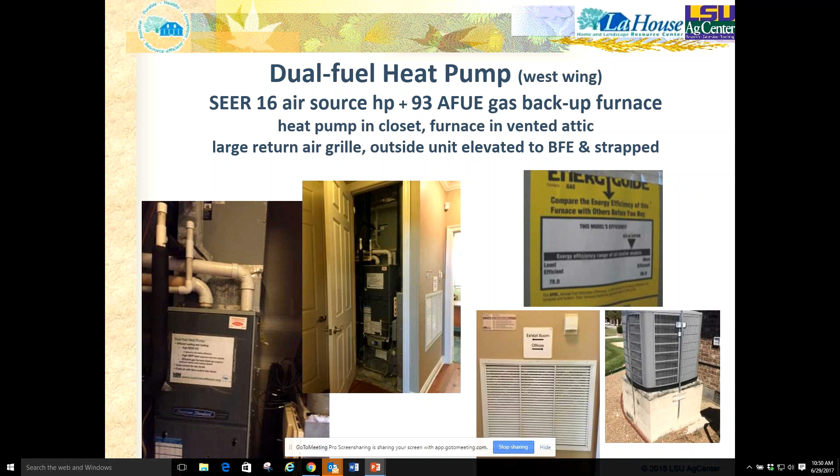We also exhibit a dual fuel heat pump, an air source heat pump with a moderately high efficiency, but where the backup heat, instead of being electric strip, which is inefficient, is a high efficiency gas furnace up in the attic. The details that go with it, the large return, the air conditioning unit elevated on a pedestal to be out of flood harm, those features are illustrated as well.

The teaching center has something a little more innovative. It's a small space with a small heating load. So instead of having a furnace or something like that, we show a tankless gas water heater, which is mid-efficiency, heats the water, also heats the air through a heat exchanger. So you get more bang for the buck of that piece of equipment.

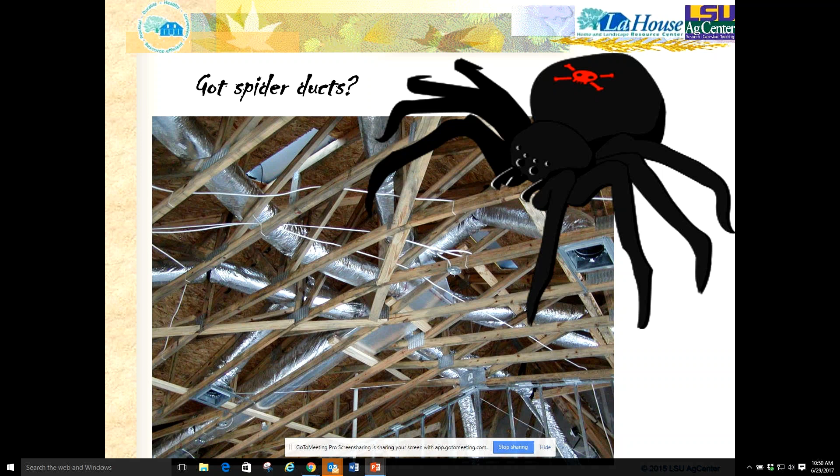This is what people tend to have. They have spider ducts - just like you don't like spiders, we really shouldn't like these things either. Not a good idea from an energy efficiency standpoint. And the more ductwork, the less efficient the flow, and the more opportunities for leaks as well.

Here's the deal for us. We tend to have air conditioning systems and ductwork in these attics. And the ducts are not well sealed. They leak like crazy. Studies have shown an average of 30% energy loss through them.

But it's not just the energy. When you're pulling air out of the house by your air conditioning system and then it leaks through the ducts in the attic, that's like taking air out of your home with a fan and pushing it outside. Well, that creates a suction, just like when you suck on a straw, it's a negative pressure. So it's causing the house to suck in hot, humid air from outside every time that unit kicks on. And it comes through nooks and crannies and can condense on cool surfaces and grow mold.

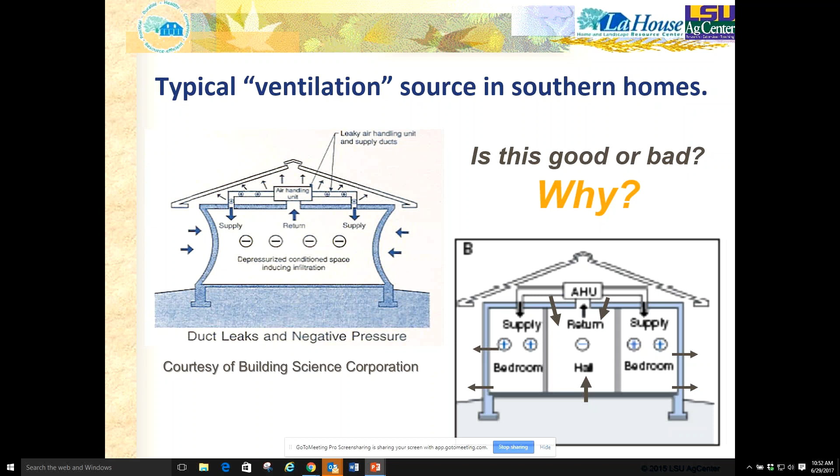Not a good thing. Then it's even worse when we shut a door. Because when we shut a door, we tend to have just one return in a hallway, and the air going into those shut rooms, those bedrooms, cannot get back to it. So they are pressurized, leaking out. The common air of the house goes super negative, sucking really hard, usually from the attic, the dirtiest, hottest air there is.

So the house demonstrates 4 ways to keep all that ductwork and the air conditioning system within the airtight thermal envelope, the insulation and air barrier boundary of the living space. And that can cut energy loss 20 to 50%, but it can also improve air quality by preventing the sucking in through nooks and crannies and causing hidden condensation and moisture problems.

So we have fur downs in hallways, going between open webs, between floors. We have embedded in spray foam under a ceiling deck, an attic deck, and then we have the unvented semi-conditioned attic where the thermal boundary is at the roof instead of the ceiling.

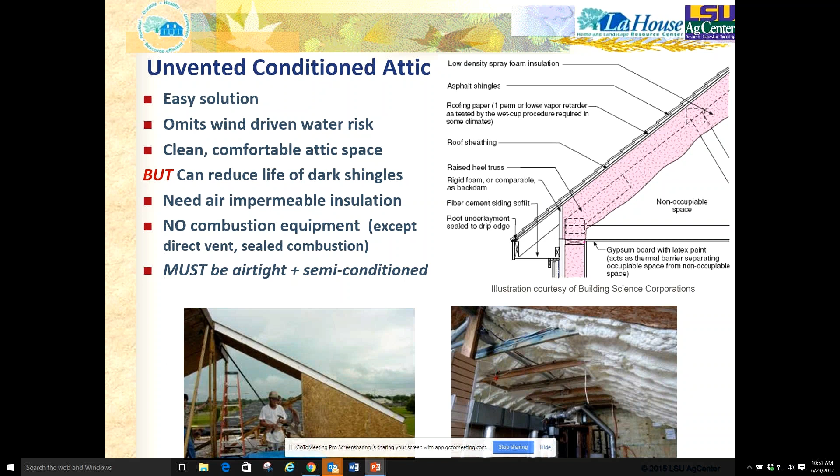That is kind of the easiest solution in new construction. It can be retrofitted, but we usually don't recommend that because it has to be done right. If it's not done right, there can be real moisture problems and air quality problems. So we don't have time to go into all the details, but you can see it has many advantages, but it also must be done properly to avoid moisture problems and air quality problems.

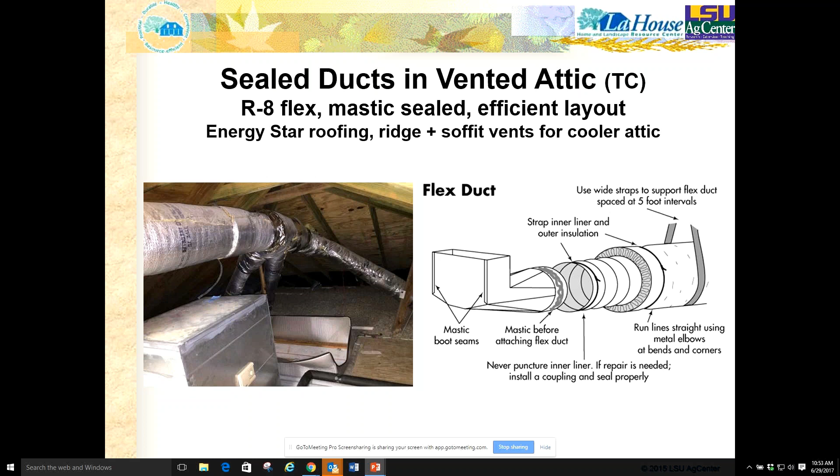In the teaching center, we do have the ductwork and the air conditioning system in the attic. It's a cool roof system, but we also show how it can be done properly with mastic sealed tight ductwork and extra insulation, the R8 insulation on it, and a good distribution system.

We advocate, we do training programs on, to train professionals to do duct leak testing and blower door testing, and we advocate to people, get it measured, otherwise you don't know. They just look at it and say, oh, it looks fine - don't use that contractor. And mastic is really the best solution to seal with.

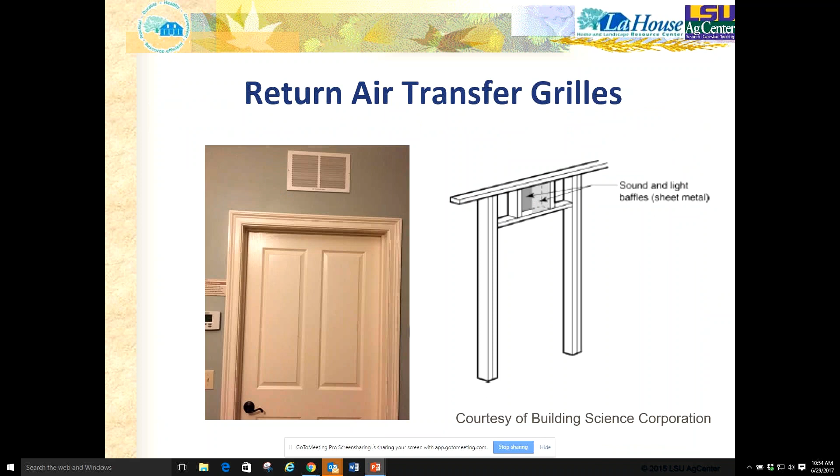The return air grilles solve the issue of when you close doors to let the air come through. These that we exhibit here have sound and light baffles to retain some privacy.

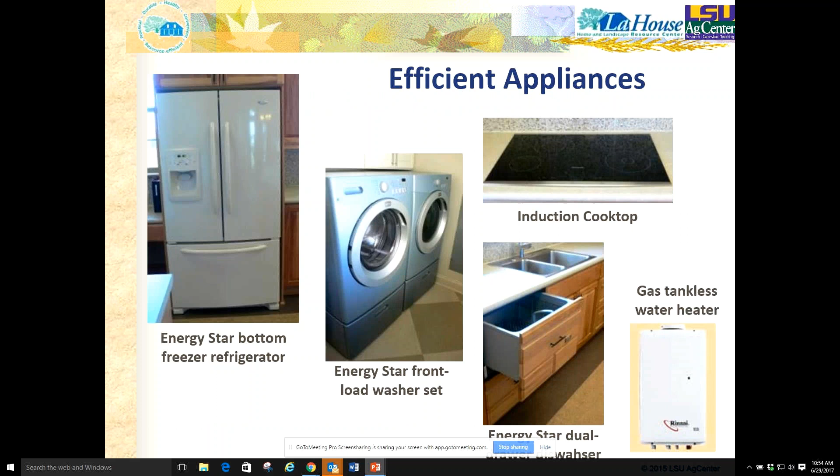Part of energy efficiency is having efficient appliances. They use less energy, so you can afford your energy bills, afford to air condition or heat your home, and they also give off less heat. That's particularly true with energy efficient lighting.

So the house shows a wide variety of fluorescent, CFL, LED, airtight insulation contact recessed cans, Energy Star ceiling fans and exhaust fans and lights and so forth. Because not only do these more efficient fixtures use 75% less energy, they give off 75% less heat. So that's part of reducing the heat gain that we're talking about in our hot climate.

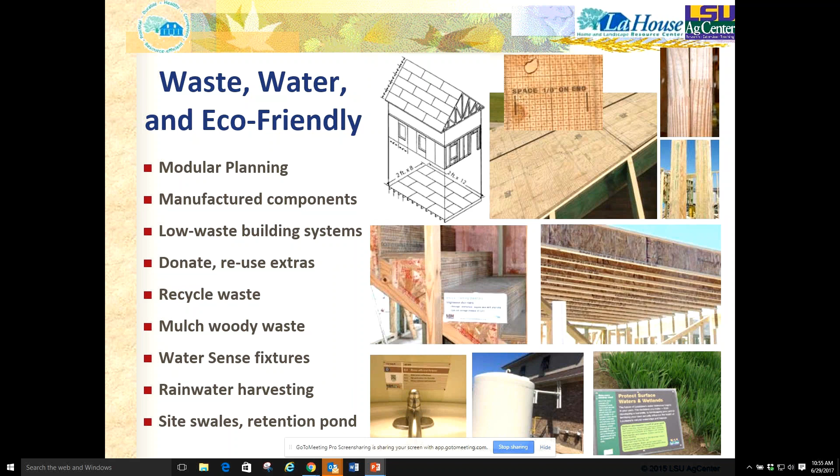The house also gets into water waste and eco-friendly features, and that helps to protect the environment, which has health implications, and our water supply as well.

Those three objectives of resource efficient, durable, and healthy also need to be balanced with what's convenient and practical. That means cost effective, marketable, low maintenance, family friendly. Otherwise, we won't make much headway, we won't go mainstream. So these were part of the criteria and the benefits.

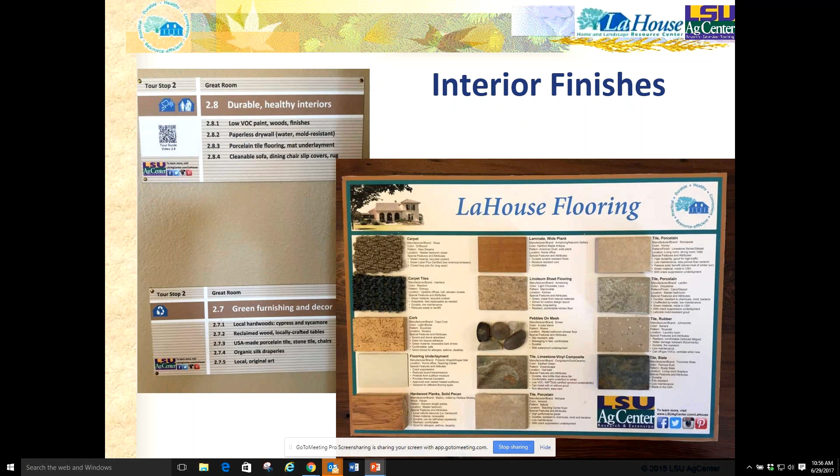Taking it a little further, the house has displays, exhibits, and signage that show the interior finishes as well as durable, healthy interior finishes. You can see examples of the signage. The little QR code shows people can scan it and see little tour guides, basically Claudette talking about these features.

We favor durable, easy care, universal design type features: floorings, clearances, grab bars, adjustable shower heads, curbless showers, and knee space, to be safe and usable throughout the life cycle.

Durable, easy care, and universal features, particularly in the kitchens and bathrooms. One of the bathrooms has a small bathroom with a normal size tub with a cantilevered seat for easy transfer, built-in grab bars. So some of these things are available without having the big opulent space.

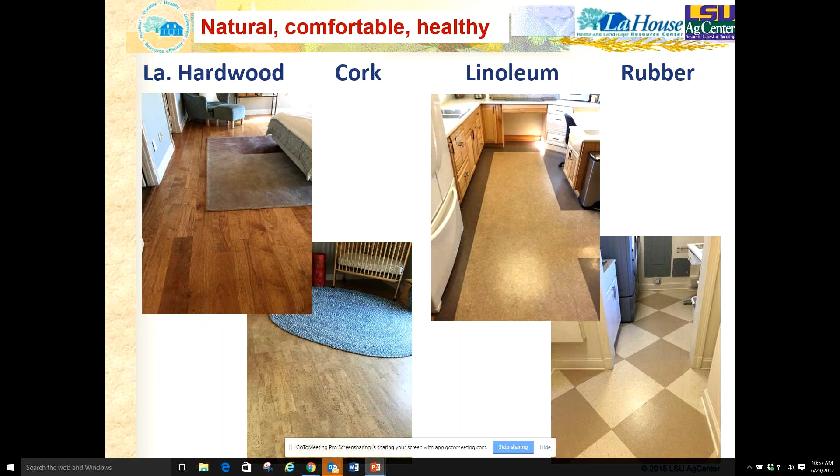Natural, comfortable, healthy floorings. We show a wide variety of options out there, some meeting the green home criteria. And then some special purpose floorings like the flood hardy kind, warm underfoot, but also limestone vinyl composites, the screen porch which has a passive solar concept, and the interlocking tile in the garage, which could be used in homes—great for flood-prone areas too.

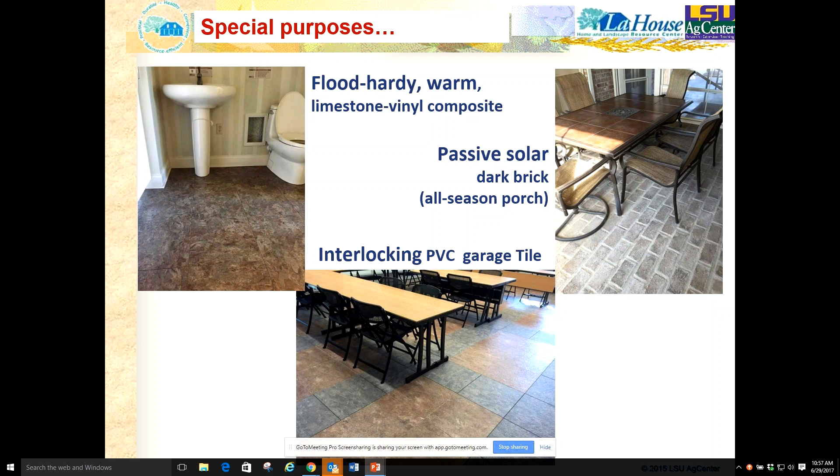All of this is about education. Even though the biggest changes in raising the bar of high-performance, durable, resilient, and healthy homes comes with adopting codes, we really believe consumer education is the bottom line key to changing the demand profile, to build demand for resilient and healthy homes—just like now the market demands granite and solid surface countertops. Let's try to create that same kind of market demand to change the norm for resilience and for healthy homes.